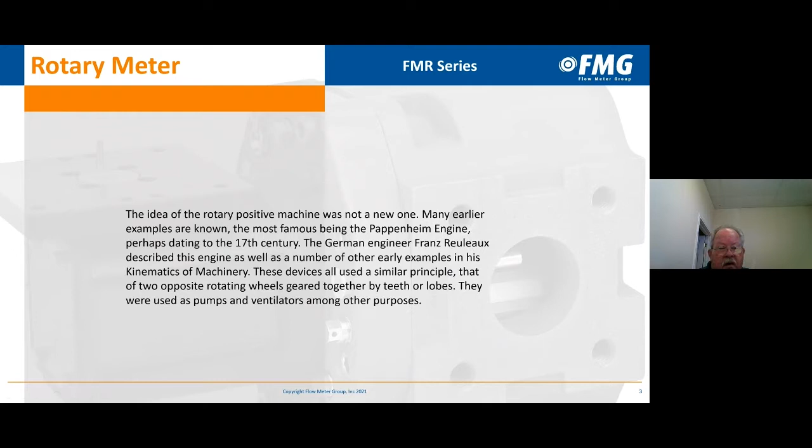So the rotary meter has been around for many years, in fact dating back to the 1600s, the 17th century. The Pappenheim engine was the first documented lobed kinematics machine that was ever utilized. Many of us here in the United States, that wasn't even an option for us. So a German engineer, Franz Reuleaux, did the first design and build of a rotary, what they called kinetics machine.

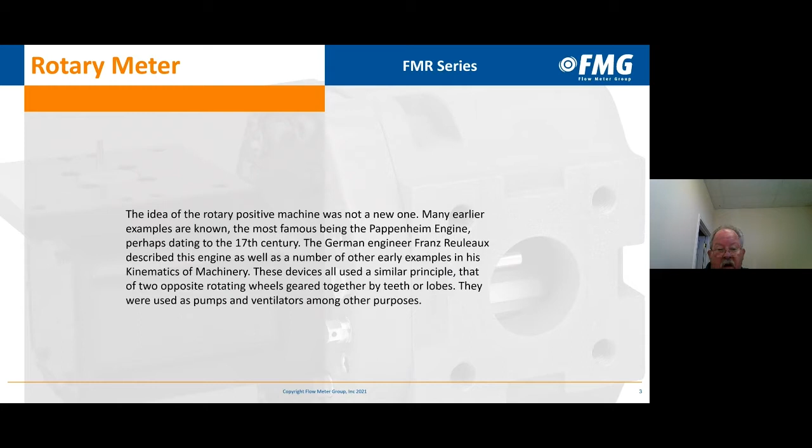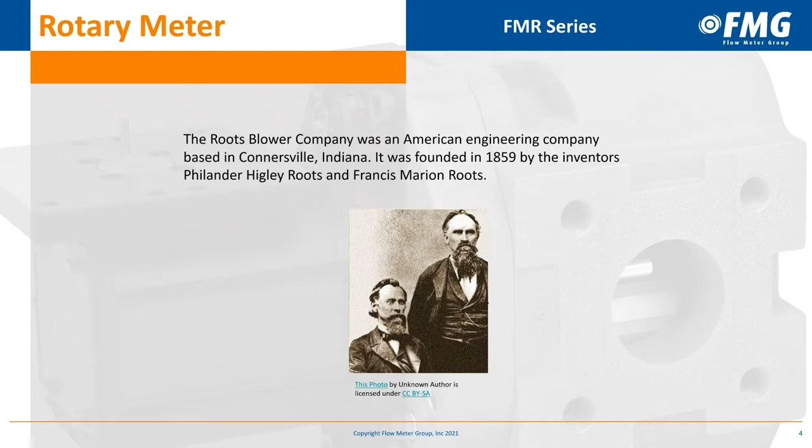Simultaneously, there was a group in Europe that developed the same identical machine, the blower, and there's absolutely no way that the Roots brothers or the group in Europe had any knowledge of each other. It just happened that way. So what we know today as the Dresser rotary meter is an adaptation off of the Roots blower. The blower design was changed in the 1920s. Better bearings were used. Instead of a motor, an odometer was put on the end, and that's where the first high capacity Roots meter came from.

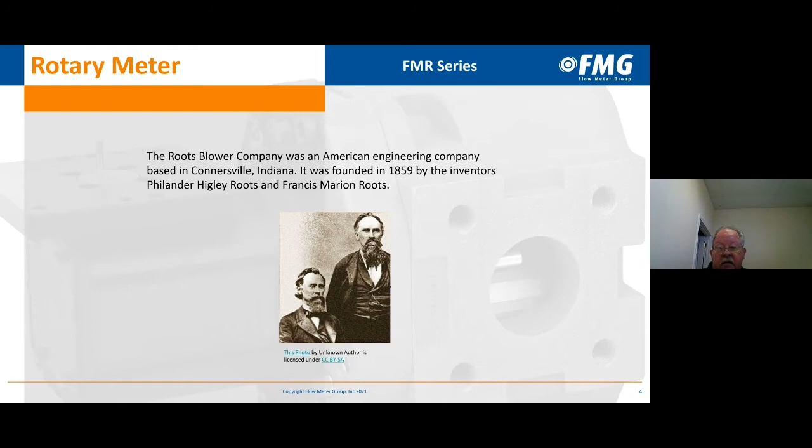So there have been many advances since the 1920s in the arena of measurement in general, but specifically with the rotary meter. So today what I'd like to talk to you about is just the rotary meter, but I'm going to point out a little bit about Flow Meter Group. Flow Meter Group was founded in 2009. It's headquartered in Doetinchem, Netherlands. Our meter portfolio is rotary meters, turbines, ultrasonics, transfer provers, flow computers, and even volume correctors.

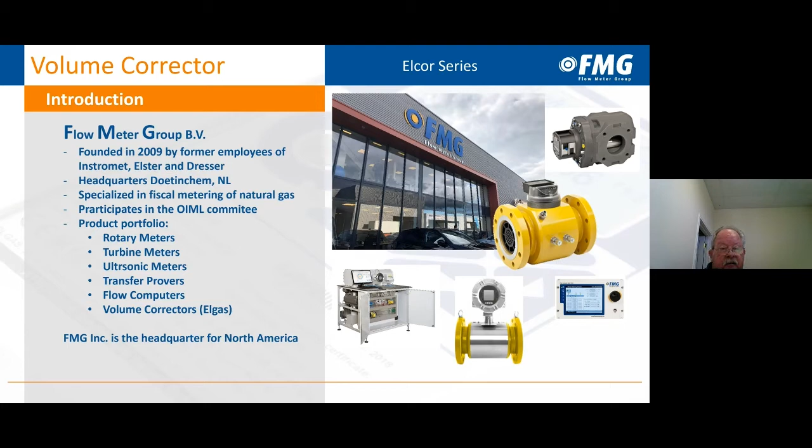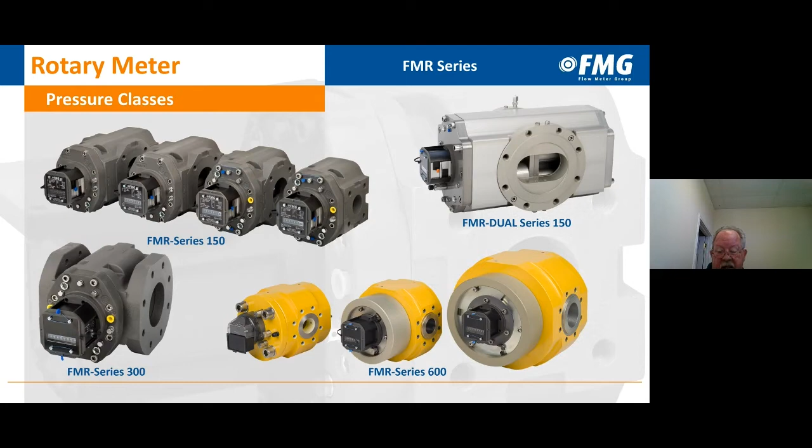So the meters range in pressure classes from ANSI 150 to ANSI 300 to ANSI 600. Years ago, the only thing you could get was an ANSI 125. Our standard in our industry today is an ANSI 150. And many sizes, anything from 1.5 inch, 1.5 M to an 8-inch 56 M, all line mounted. For those of you that have been around rotary meters for a while, anything above 38 M, 56 M, 102 M were all cast iron foot mounts. That's not true today. So we take a 56 M through a lightweight aluminum line mounted meter.

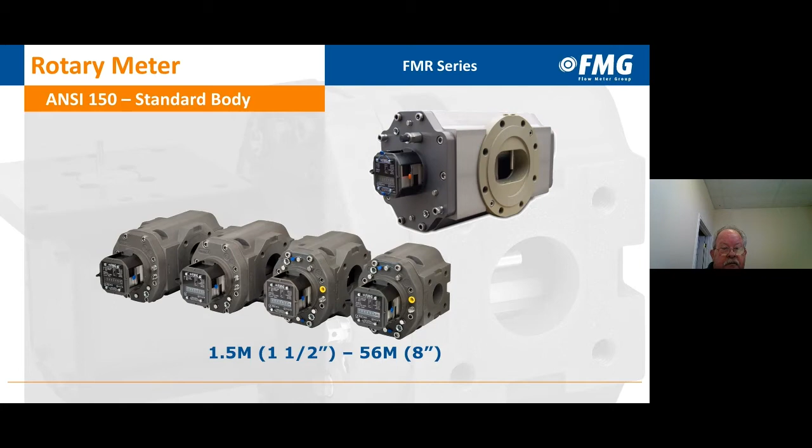Some of the meters can come in different styles for you. Whereas before, a typical 5M was only a 3-inch connection and 7s and 9s were 4-inch connections. Now the accommodations are made 5M through 9M to get them in either a 3-inch or a 4-inch fashion. That was not available even 10 years ago, well, 12 years ago.

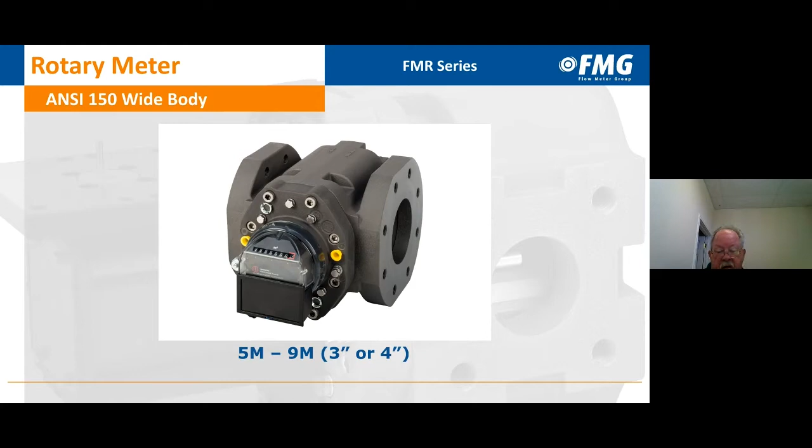So the principle is the same: 2 contra-rotating impellers inside the meter. 1 full revolution of these impellers gives you a known volume from the inlet to the outlet. And it is considered a positive displacement meter. A turbine would be a good example of an inferential meter. This is not it. This is a positive displacement in the same class of measurement as a diaphragm meter.

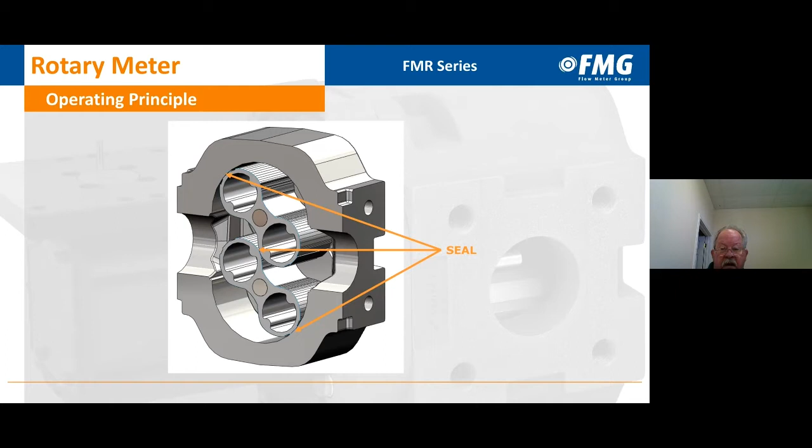There are no physical mechanical seals inside of a rotary. All rotaries run on the same basis of specification of distance between the impellers and the inside wall of the measurement chamber. As the impellers turn, you can see the wiper in the middle, and then 2 low spots, one before and one after the wiper. As the impellers turn, those low spots create what's called a fluidic seal or a capillary seal. It is as tight as a mechanical seal. So leakage across the impellers is pretty much non-existent.

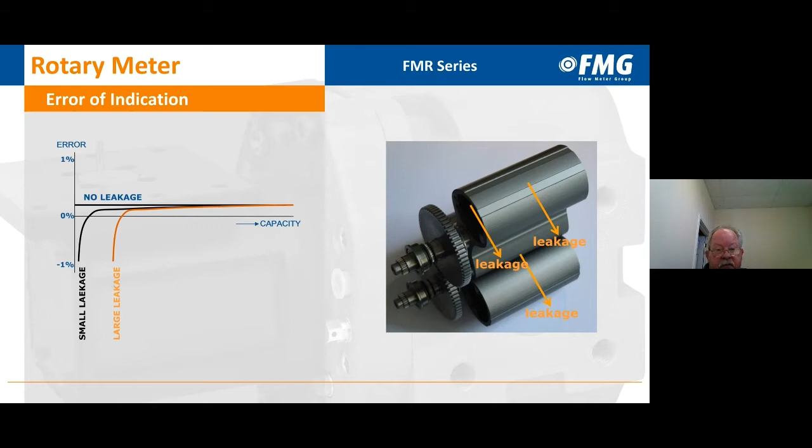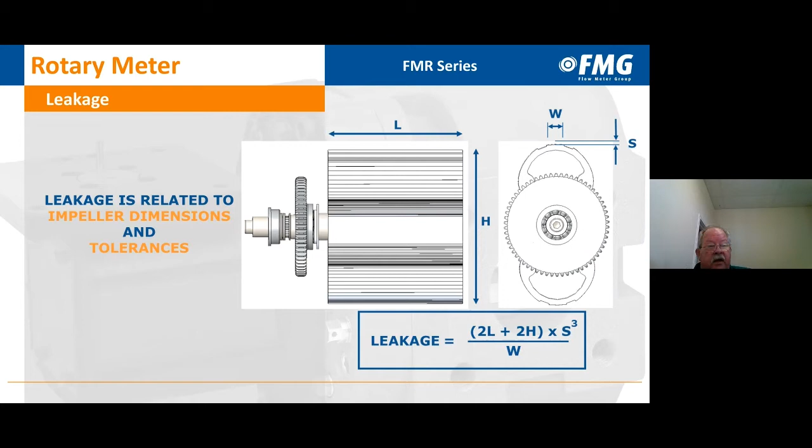Will it leak at a very low rate? Yes, but it's minimal. And that is true with any rotary meter. The length and width of the impeller determines leakage. That is all taken care of or looked at with a mathematical formula. For those of you that are bored and would care to try it, go right ahead.

Turn down ratios. Turn down ratios vary on the size of the meter and the medium that is going through the meter, whether it be air, natural gas, or any number of gases that are typically monitored by a rotary flow meter.

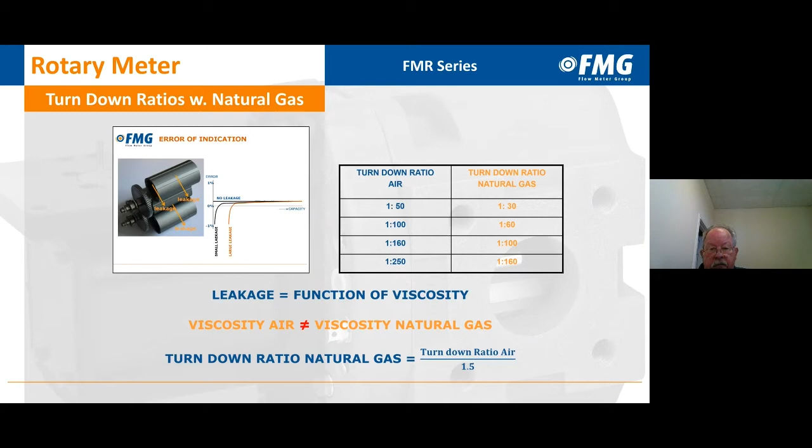Here's one of the biggest changes over the years in rotary meter design. Typically, a rotary meter was put together so that you had to completely take every piece of the meter apart to repair it or to check it. Take the FMG, for instance, we have a cartridge design. So only one side of the meter requires oil. There's still 4 bearings, but the bearings on the back side do not require any lubrication. They are considered permanently lubricated bearings.

So once you pull the head cover off, you can actually pull the cartridge out, inspect it, clean it, repair it, clean the inside of the meter, and put it back together. This is the only meter on the market that you're able to do that with.

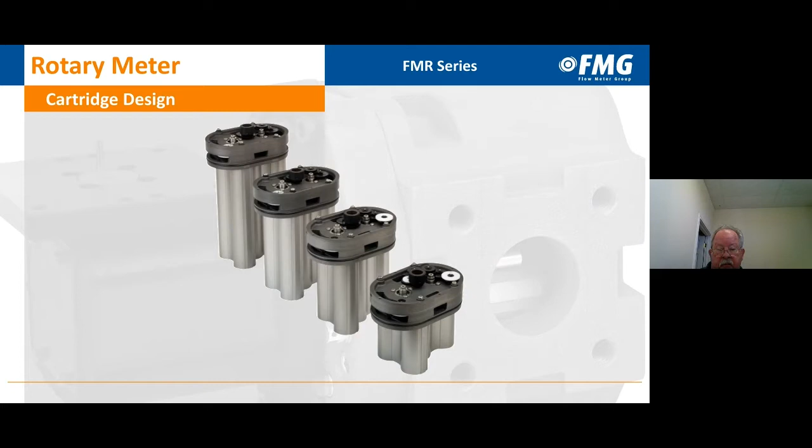Another quick change, well, I shouldn't say quick, but a big advancement is gear reduction. So the meters will turn at a known rate, and somehow we have to get those impellers turning to relate to cubic foot or cubic meters of flow through the meter. On all manufacturers except us, that gear reduction is done in the index. With the FMG meter, one huge advancement was putting that gear reduction on the cartridge of the meter.

So what does that mean to us? That means that if I have an 8C or a 56M, the index is the same. There is no specific index per meter. With all other manufacturers, if you have a 3M meter, you better have a 3M index to replace. Will a 5M physically fit on a 3M? Absolutely. But now you've got gear reduction problems. You do not have accurate accumulation of the measurement.

With the FMG meter, we took that out. We took that problem completely away because you cannot put a 3M cartridge in a 5M body or a 5M cartridge in a 3M body. All the gear reduction for the index is done on the cartridge itself.

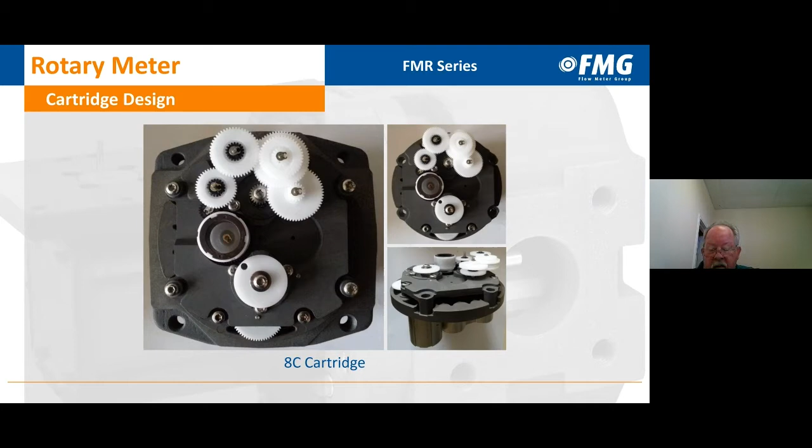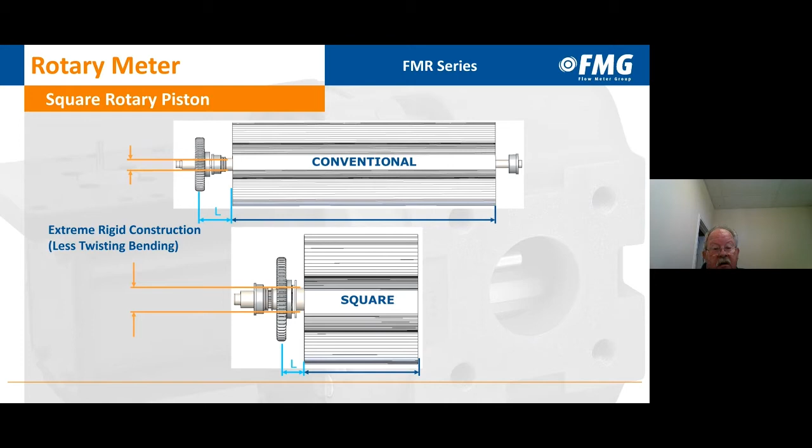Also, the shaft for the impeller, much thinner on a conventional rotary meter, much thicker and much closer that you're able to put the gear to the impeller, which again makes it a more robust meter, less likely to spin a bearing, less likely for lockup. Again, a huge advancement in the rotary meter market.

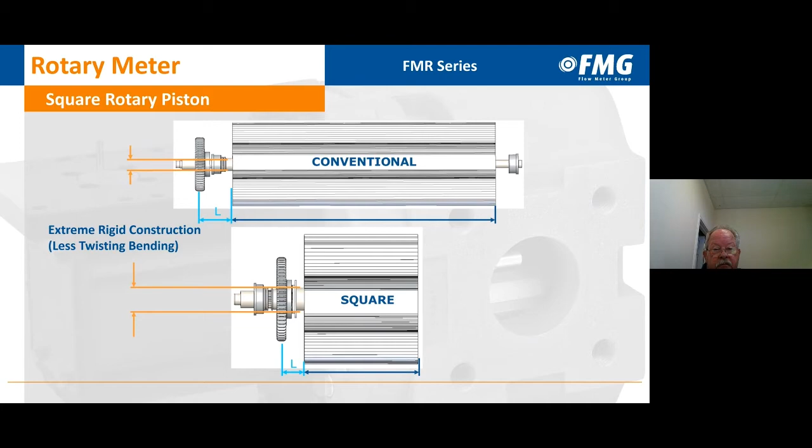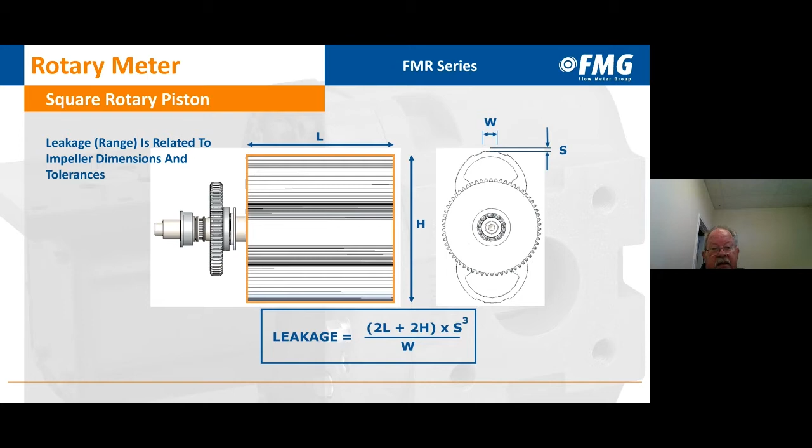Leakage, we'll go back to that again real quick for those of you that love math. The tolerances are 2/1000 of an inch. So very, very minute tolerance. Here's an actual application for the patent for our square impeller, as we call it. Our chief engineer, Raymond Richards, was awarded a patent by the European Union for his design on these impellers.

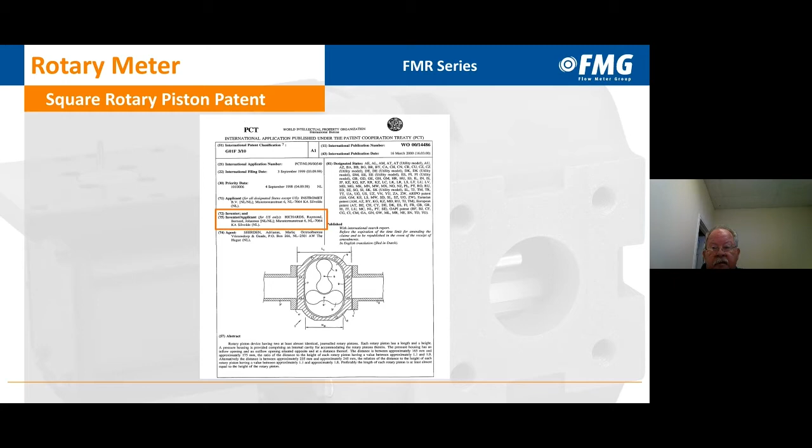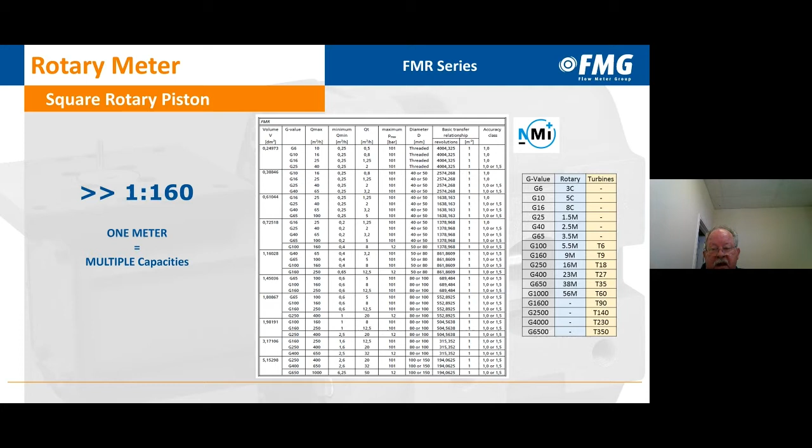So let's talk about sizing and overload. So typically a rotary meter, especially on a dynamic flow, is the best choice between 300 cubic feet an hour and 56,000 cubic feet an hour. It follows a profile simply because it's positive displacement. In the FMR series, you'll see where the accuracy goes much lower than a typical rotary meter. Where a typical rotary meter is accurate down to 20% of its flow, we're accurate to 2% of our flow.

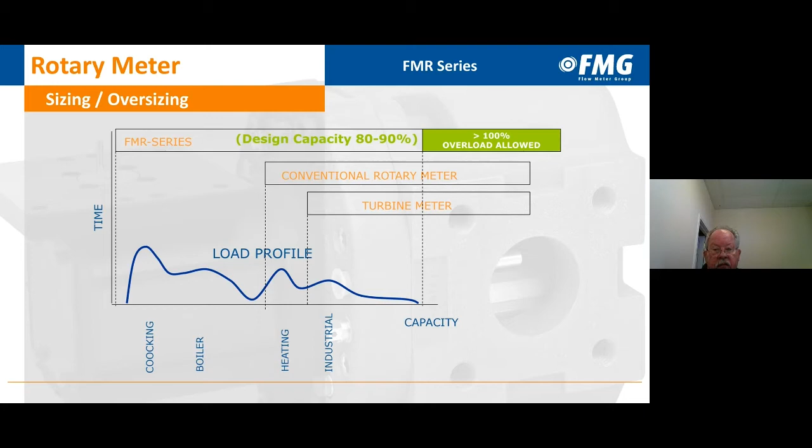I don't know if this particular slide is going to work, but I'm going to give it a try. And for those of you wondering what that noise is, this is a 5.5M running at 23,000 cubic feet an hour, 400% of its designed load. So yeah, it'll be noisy for a minute, but I think you'll understand. Let me get back over here.

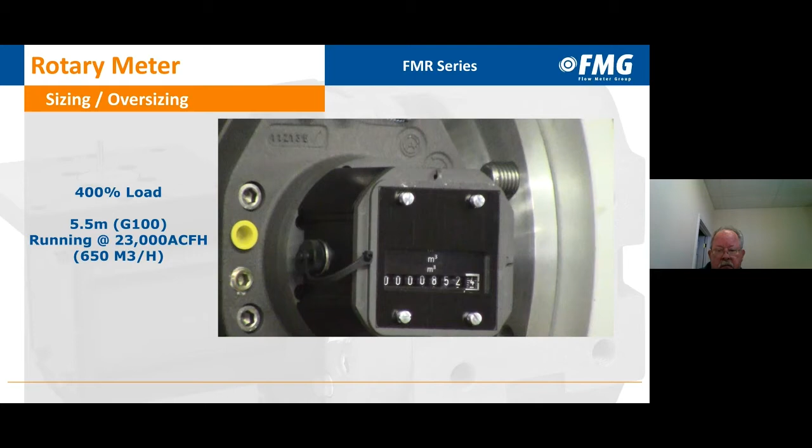So as you can see, that odometer looked more like a stopwatch running than a gas meter running. So a 5.5M meter running at 400% of capacity, and then a test was run on that meter after it was done, and the meter remained perfectly accurate and no damage to the meter itself. That cannot be done by any other meter other than FMG. A huge advancement in the technology of rotary meters.

While everyone else requires a restrictive orifice plate downstream to restrict their meters to 120% of capacity, with the way that our company has advanced rotary technology, that's no longer an issue. So huge change.

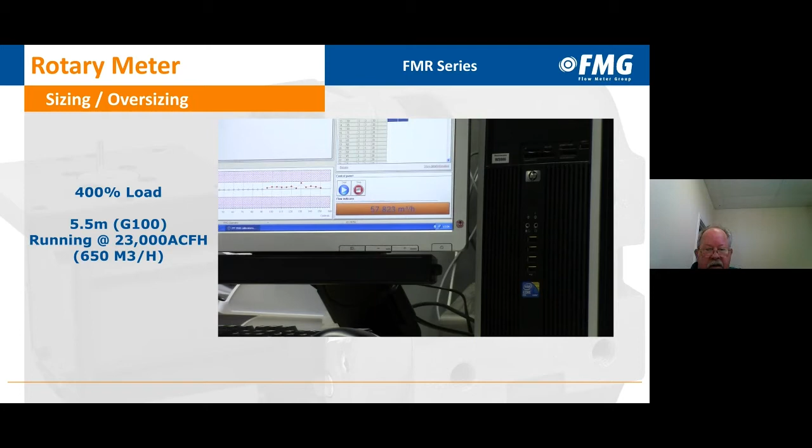Another big advancement in rotary meter technology is oiling the gears, oiling the bearings. As I said earlier, only one side of this meter has to be oiled. In all other manufacturing and throughout history with the rotary meter, both sides had to be oiled. So both sides had oil reservoirs, and they used an oiling system called a vane. So it's a strip of metal that is attached to the end of an impeller. As the meter flows and the impellers rotate, the vane dips down in the oil, throws the oil up to the top of the cavity, and then you hope that oil gets to where it needs to be.

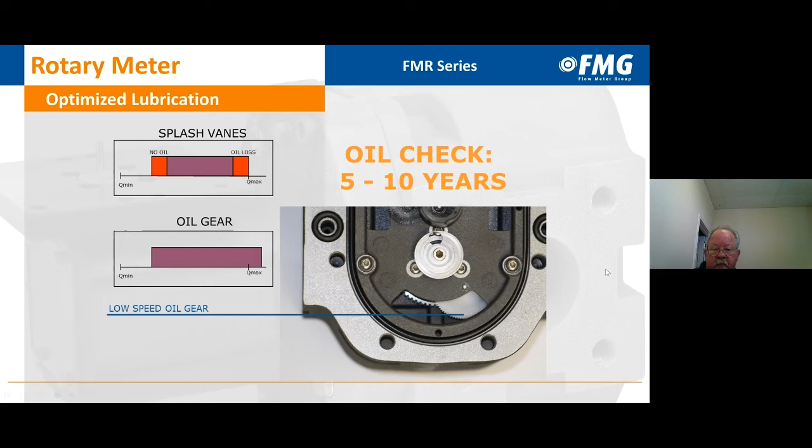So with optimized lubrication, now you can check the oil every 5 to 10 years or whatever your state and company standards are. We suggest 5 to 10 years because we know the oil is going to stay where it was designed to be and not thrown downstream.

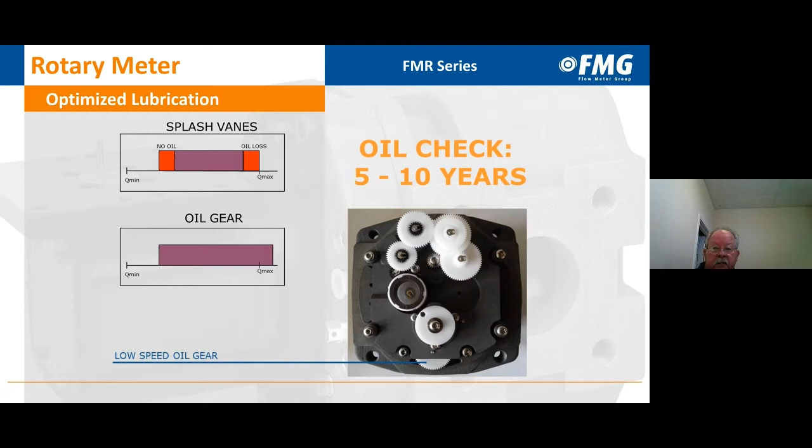So some other advancements with the rotary meters today is an aluminum double wall. All of our aluminum is anodized inside and out. So painting is not an issue. You don't need it. A lot of companies still paint them, and that's fine, but it's not needed as it is with others. We use a polycarbonate glass window. It is UV resistant, and it's a much bigger window to be able to see the read on the meter.

In conventional rotary meters, there is one position for the index. With the advancement that FMG has been able to incorporate, there's a 350-degree rotation. So you can place that index how you need it instead of, gee, I wish I could do that. So just a minor adjustment, and it does not interfere with the accuracy of the meter. It just makes it easier to read the index.

Instrument drives are reversible, and that's been a good advancement for everybody. And I don't care who the manufacturer is. The question is, how easy is it to do? My personal opinion, and I've worked on all of them, I think the FMG is the easier way to change direction of the instrument drive. If you need clockwise and it's set up for counterclockwise, it is an easy change, and vice versa.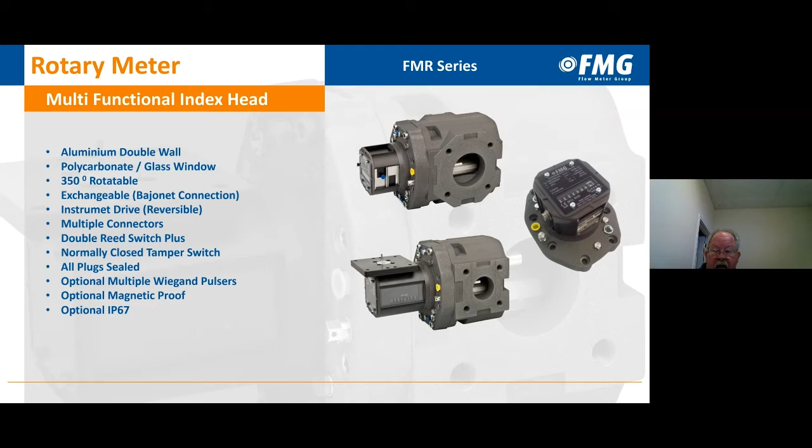I think another big advancement is the oil sight glasses. So we put two in, whether you're putting in horizontal or vertical, you have a sight glass.

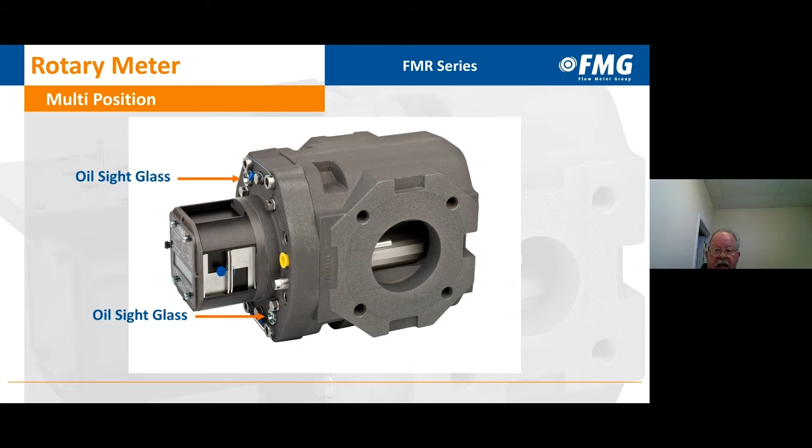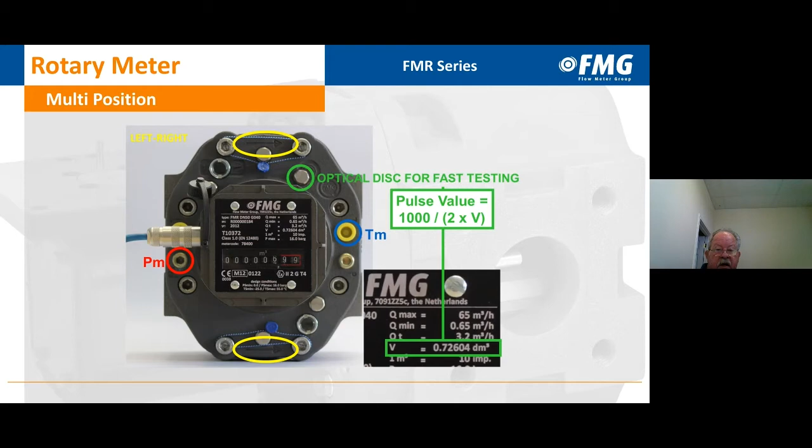They can also be set in multiple positions. And as you can see, our bolts that protrude can also have a security seal put on. We have both temperature and pressure taps on the meter.

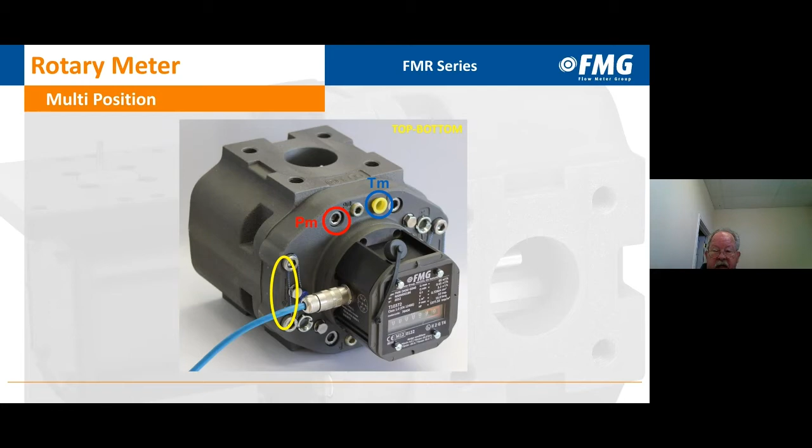With a typical manufactured rotary meter, you can see how many places are available to get into that meter and tamper with it, whether that be adding grease, trying to defeat the magnetic couple. Some people will go in and actually cut impellers.

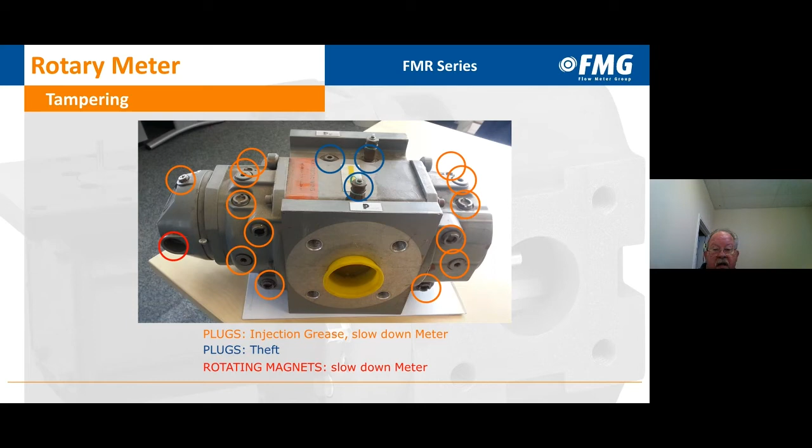It is very difficult to get into an FMG meter. I think that is a huge advancement for the integrity of the meters today.

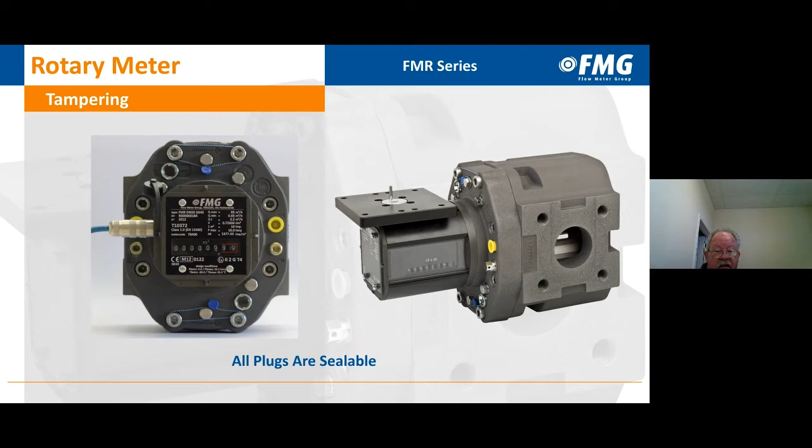So as you can see, all the plugs are sealable so that it's a little more difficult, but as my grandfather, who was a retired police officer, said, locks only keep honest people out. So we can put tamper seals on everything, but if somebody wants to get in and mess with a meter, they're going to do it.

We have seen in many cases where a conventional rotary meter was being used, the meter locked up, and the customer or even the town lost gas supply. The way this particular bypass works is if the differential goes high, the bypass will open. It is a mechanically resettable bypass.

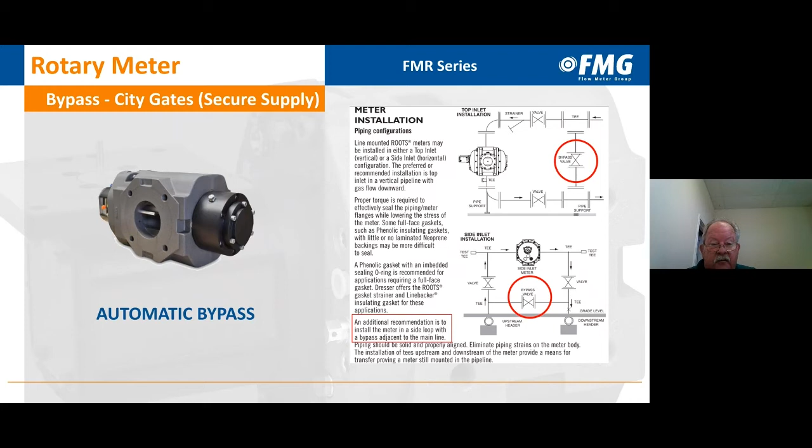This bypass also has a contact closure. So if you're running this through a flow computer or even a volume corrector that has communication, you can send that contact closure to your electronic device that can then notify someone - a control room, a pager, a text, whatever.

So it is full capacity. If your meter is a 3M, you'll get 3,000 cubic feet of flow through there. So your critical applications are not lost.

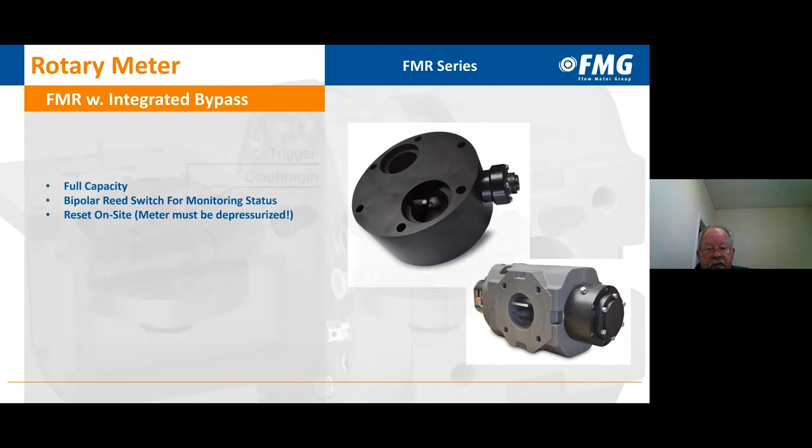As I said, it is resettable mechanically. You can see on the left-hand side, the bypass is closed. On the right-hand side, the bypass is open.

If you look closely, you'll see what looks like an oil sight glass, and directly behind it, a steel pin. So if you're out at a facility and you think the meter's in bypass, look at that sight glass. If you don't see anything, it's not in bypass. If you see that steel pin in the window, you know it's in bypass.

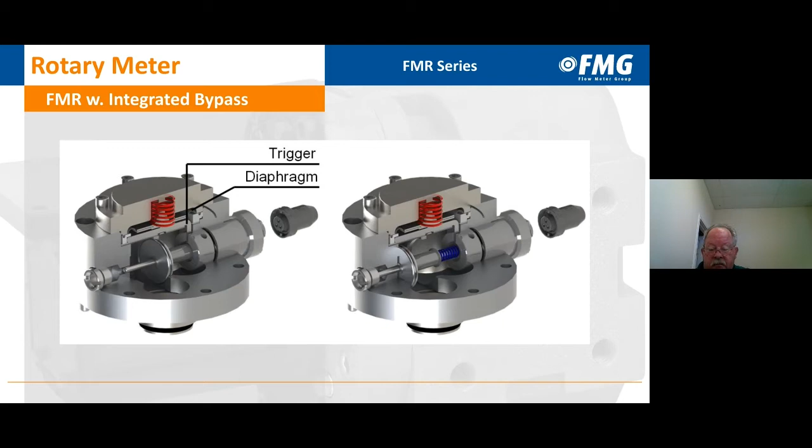This particular advancement in rotary meters has made a huge difference on high capacity. I don't know how many of you are familiar with getting a pulse downstream of a rotary meter when it's running, especially at high capacity. That's just the nature of the beast.

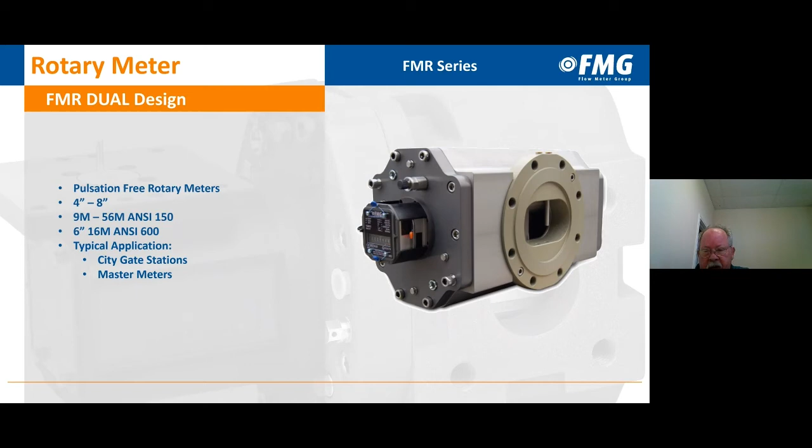Two impellers - it pumps, becoming a pump at a point downstream. What FMG has been able to do is put two sets of impellers inside, offset 45 degrees. So you get a smooth flow downstream of the meter, not a pulsing or a puffing, as some people call it. The two sets working together, but 45 degrees out of phase, gives you a smooth transition from the inlet to the outlet and further downstream.

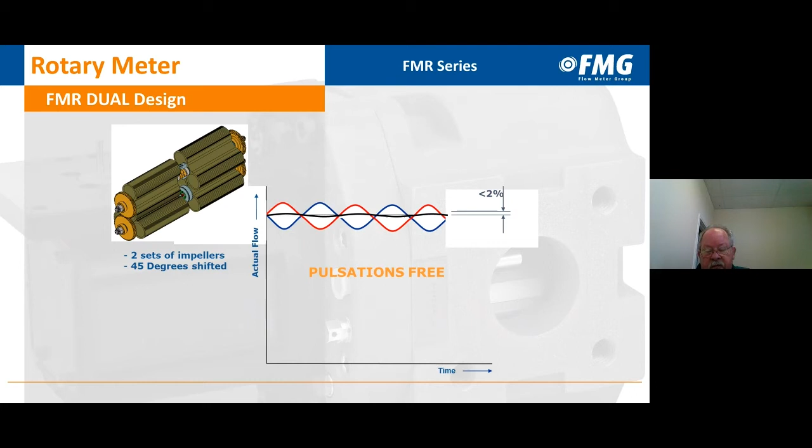This is what it actually looks like. Very simple design, but a huge advancement, especially in boiler applications and large industrial applications. This meter takes pulsation out of the line.

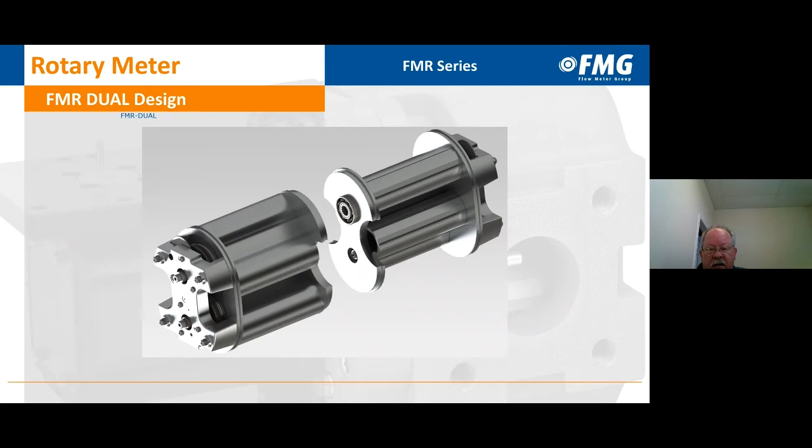Also available are different sizes. Our ANSI 300 has a maximum pressure of 500 PSI, which is higher than most.

This is a typical natural gas filling station for cars and trucks. Our meters are quite common there. They can take the load of 0 to 100% and back down again very easily, and again, without the restrictive orifice plate.

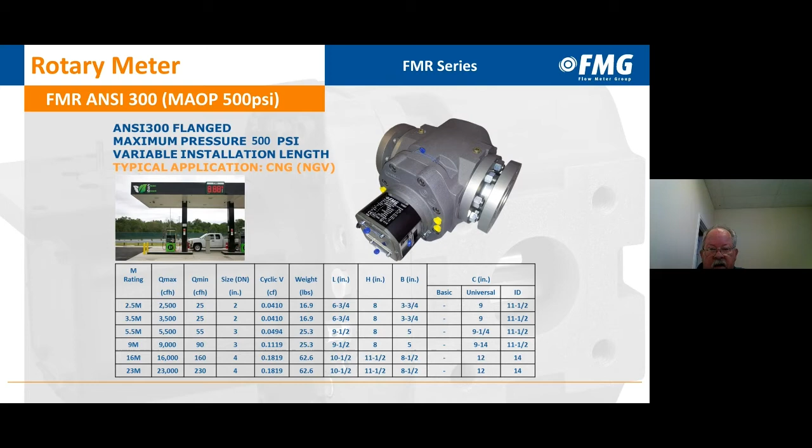High pressure meters, again a huge advancement in that they are cartridge design. So once the main meter is put in line, if for some reason there is an issue, you can pull the cartridge and leave the body in line.

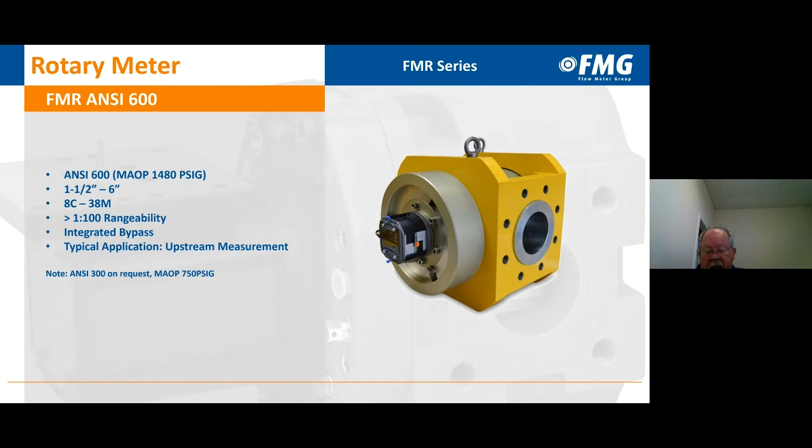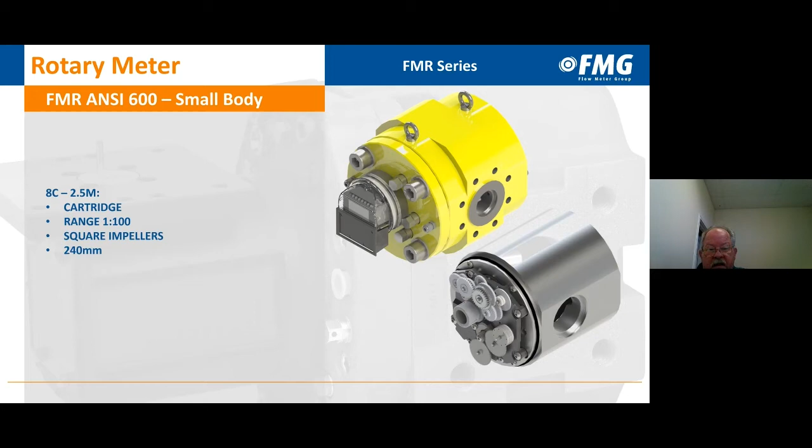We do supply cartridges, and the pricing varies on those. The cartridge exchange is pretty easy. I have done it, and several of our customers have done it - a very quick change out.

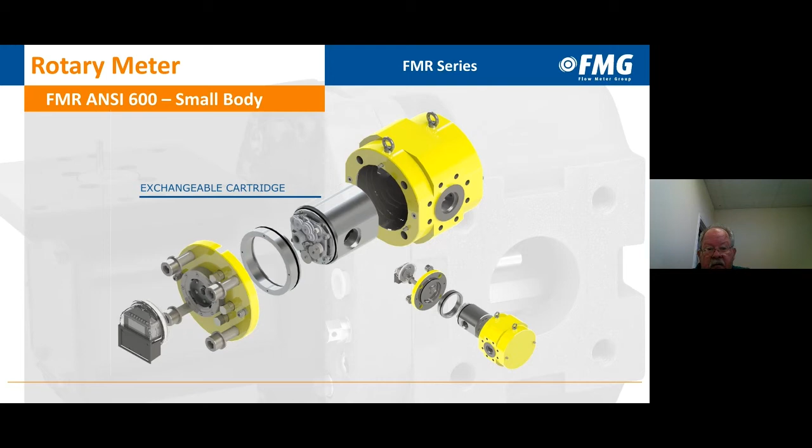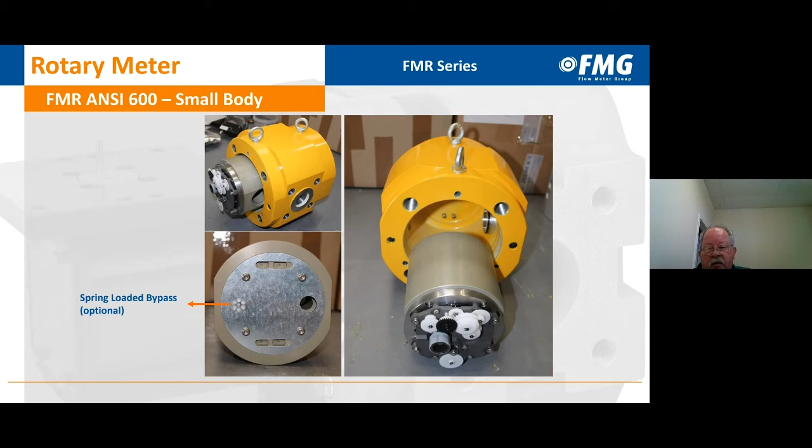Even with our ANSI Class 600, there is an option for a bypass. Again, for critical applications, you cannot lose the gas supply. The spring-loaded bypass will allow you, if the instrument locks up, to open the bypass so your customer stays up and running, or your town stays up and running. We've gotten several calls where in the middle of the winter, 30 below zero, a rotary meter failed, and they cut the supply to a town. It wasn't intentional, it just happened.

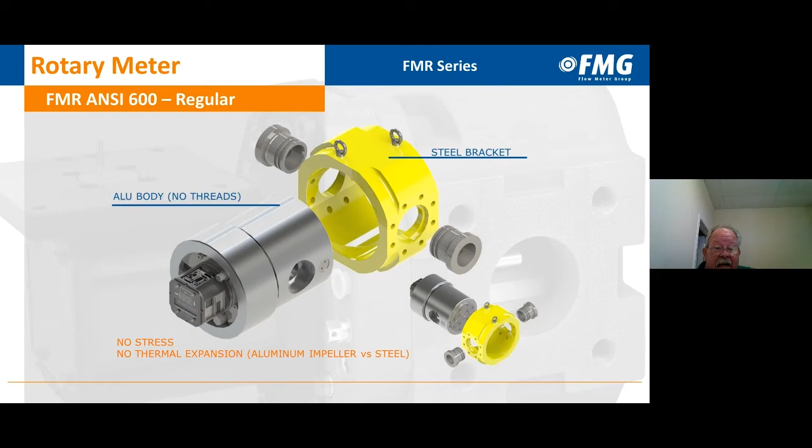With the advancement of the bypass and its availability, that problem is no longer an issue. The ANSI class can run anywhere from a 2.5 M to a 16 M. Again, easily installed, typical meter installation. The difference is if you need to service it, you don't have to pull the complete body out of the line. It's pretty easy to take apart, much easier than anybody else's. Again, it's engineering design advancements.

As with all other meter manufacturers within Europe, everything has to be NMI and MID approved, or OIML approved. We use NMI to do that approval.

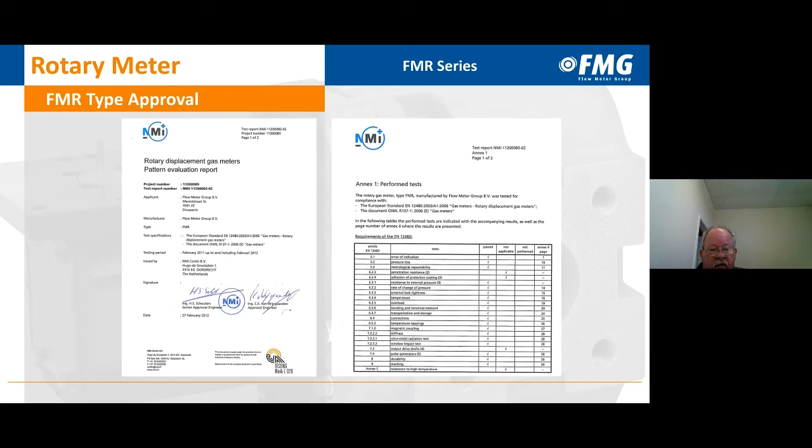Any questions? Mark, thank you, that was awesome. I do have several questions.

First question: is the maximum working pressure for a 150 ANSI meter 285 PSI? Aren't most rotary meters rated at 175 PSI? They are, but that's a true ANSI 125, not an ANSI 150. An ANSI 150, we rate ours at 285 PSI, certified by NMI and other international laboratories. But other meter manufacturers are usually saying ANSI 125 because that's the main rating they've got, or the main approval, and it limits them to 175 PSI. That is correct.

Another person asked, what does turn down ratio mean? Turn down ratio, as it was explained to me many years ago, is that at 100% capacity, how low can I go and maintain a known accuracy? So if you have a 5M meter, which typically would be 5,000 cubic feet an hour as a maximum, if we take that 5,000 and divide it by 120, that means I can go down to 41.67 cubic feet an hour and still remain 1% accurate. That's a turn down of 120 to 1.

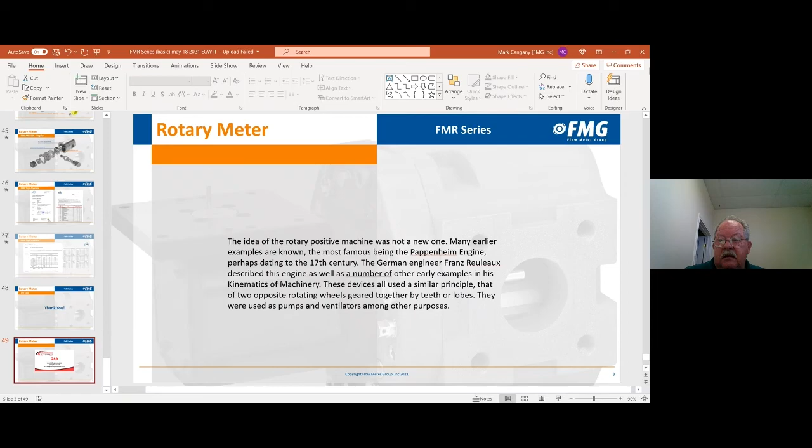Daryl, if it's okay with you, I'm going to quit sharing my screen for just a moment and see if I can find that PowerPoint on the flow benches, so at least you'll get a look at what one looks like. Bear with us just a second, folks. You get to look at Mark's beautiful face there for a minute, and then we'll get the PowerPoint back up. That ought to scare the bejeebers out of somebody. Well, here, if nothing else, we can take a look at the flow bench. I am not sure why my computer is running so slow today. Only when you need it to be fast. Of course.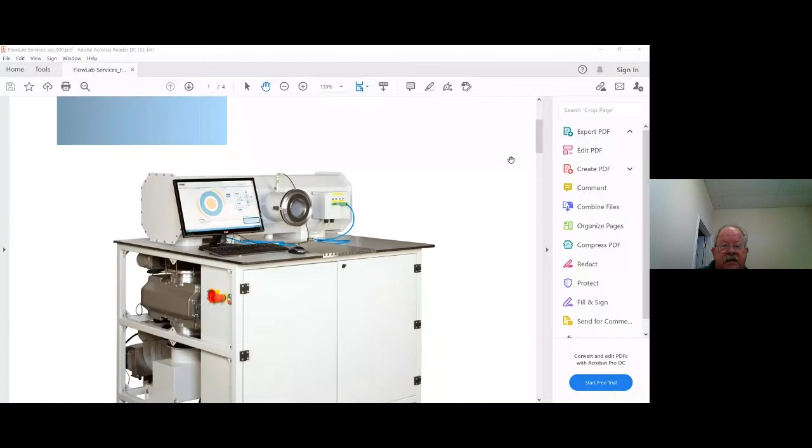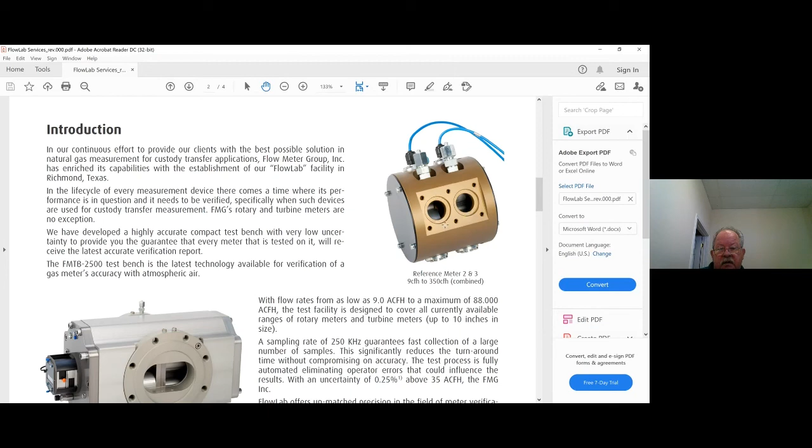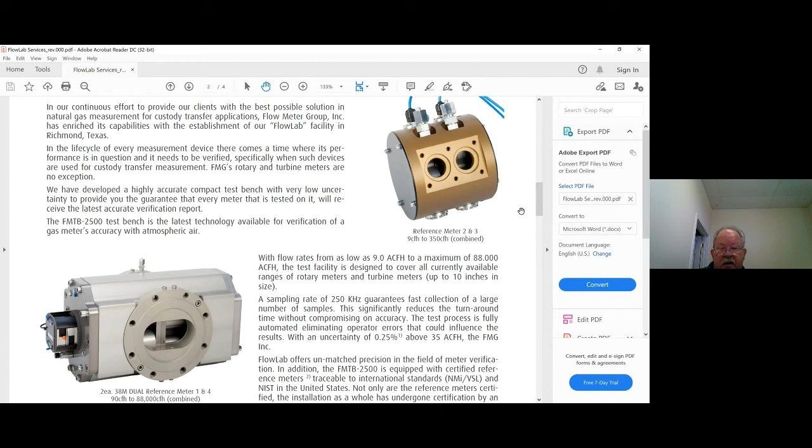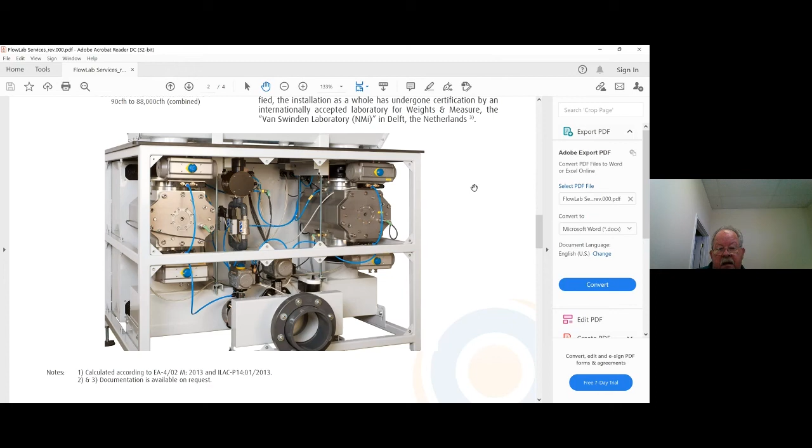Within this box, which again is smaller than the average desk that people work on, we can put two 38M master meters and what we call a split chamber 9M. This will take us from just a few cubic feet an hour, here's the split chamber 9M, so 9 cubic foot to 88,000. This is on our small bench, we make 3 other sizes. So you can see it's a very simple design, two 38Ms, the split 9M, and then we have a blower that sets off to the side.

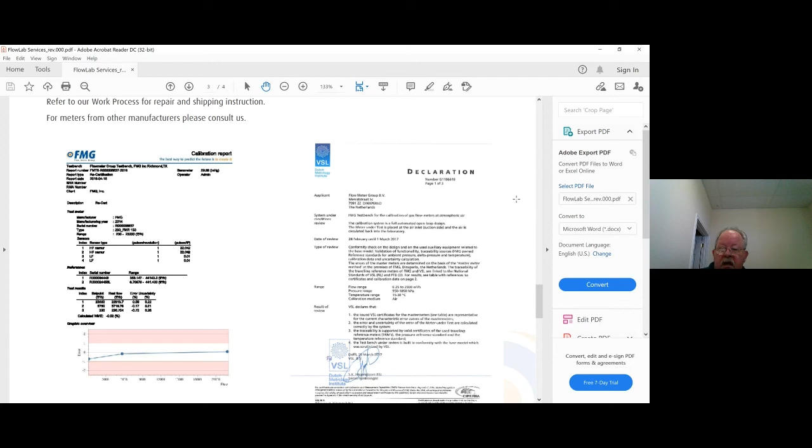Everything is certified by VSL, the entire flow bench, not just the master meters. We have it all done. We also look at what's called uncertainty. Everything is manufactured to a specification plus or minus something, so we know what the manufacturing specifications are. We also know per component whether it runs to the high side of its acceptable limit or to the low side. We take all of that into consideration, and that's called uncertainty. No other manufacturer of meters or flow benches does that but us.

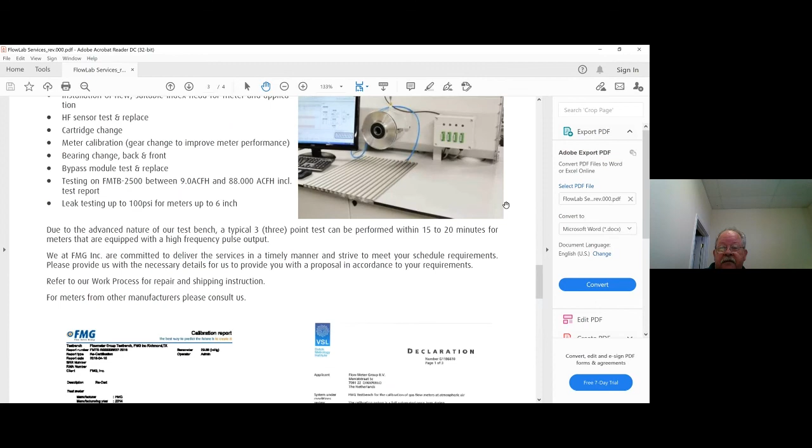Somebody just asked, has anyone in North America purchased one of your test benches? Funny you should mention that, Fortis BC Gas. Yes, and if you'd like to see one, we have one available and would love to host you here in the Houston area. Our office is officially in Richmond, Texas, although I consider it Katy, which is just on the west side of Houston. So if you can make it to Houston, we'd be more than happy to show you ours.

This picture that you're seeing now, you see the computer screen. On this side of the header is an option to expand your flow bench up to an 8-inch fitting. You can do up to 6-inch here in the front, but you can go 8-inch on the side.

So yes, Fortis BC Gas has purchased one. As a matter of fact, I had 3 of their people at our facility in Doetinchem, Netherlands. We had 9 of these running in production, in the production area, and everybody was talking at a normal level. Nobody was screaming. You didn't miss what the other person was saying. And then we had our largest one at the time running at 100% of capacity, testing some turbines for a company over in Germany. That thing was running at 320,000 cubic foot an hour. And again, we were carrying on a normal conversation, standing within 2 feet of that test bench.